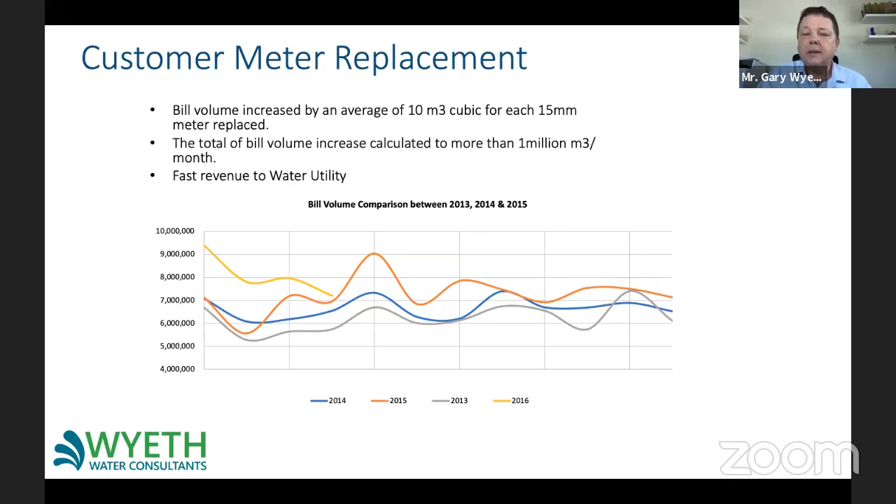Now that increase in revenue is something we're looking at because it's often what we call the virtuous cycle. As our revenues increase, we can actually spend more of that money. That revenue can be used to invest in further NRW programs, maybe pressure management, protection, or even more meter replacements. That will help reduce the NRW even further, which will give us more revenue or decreased operational costs, which will then improve the water utilities' revenues and profits - which is what happens.

Utilities work in this circle and they gradually improve, which is why a lot of non-revenue water programs take a long term - they can be 10, 15, 20 years. Utilities like Selangor's been doing non-revenue water for over 20 years. Johor is 15 years, that's been ongoing, and they're still working at it now. So this is something that's not going to happen quickly.

Now the issue we have with holistic programs is that often they can only be limited in length, maybe 3, 4, 5 years. So because we're looking at that longer period, it is the utility that needs to take over once the shorter holistic program has finished.

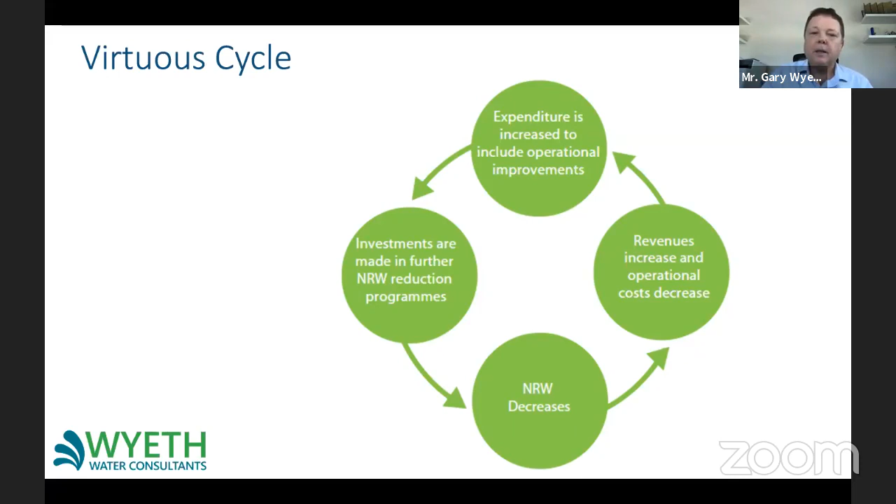So this means the government has to, either at a state level or federal level, subsidize these utilities to cover their costs. Now this can be done for political reasons, because you want to keep the people happy, or you don't want to increase the water rates too high. But if that's the case, there needs to be a fixed subsidy so that the water utilities know exactly what they're going to be getting on top of the revenues from their metering.

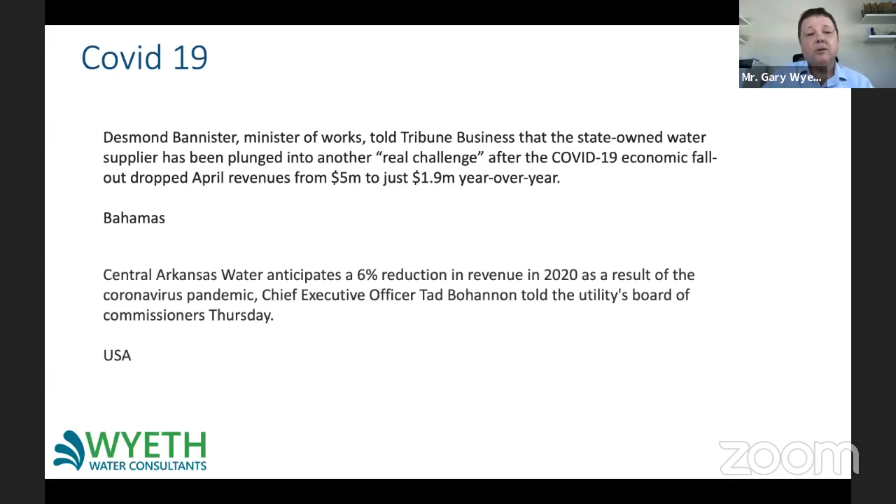So what's going to happen there? Are the governments going to have to subsidize that loss that's happened over that period of lockdown? And how do the governments actually work out roughly how much it is? Or do the utilities have to start looking at cost saving measures? Do they have to say, okay, we've lost money this year, 6%, 7%, 8%, so we're going to cut down some of our programs. And probably NRW would be one of the programs that they would look at and say, oh, maybe that's not so critical.

But fortunately, there are people out there who believe that this situation where you actually have lower revenues coming in is an ideal situation to boost the non-revenue water activities, because they're the ones that are going to help you to increase your revenues further and also decrease your operating costs, especially if you have a lot of repairs that need to be done or mains replacement. Hopefully, once we've got through this year and we get into next year, we'll be able to start getting back onto normal footings.

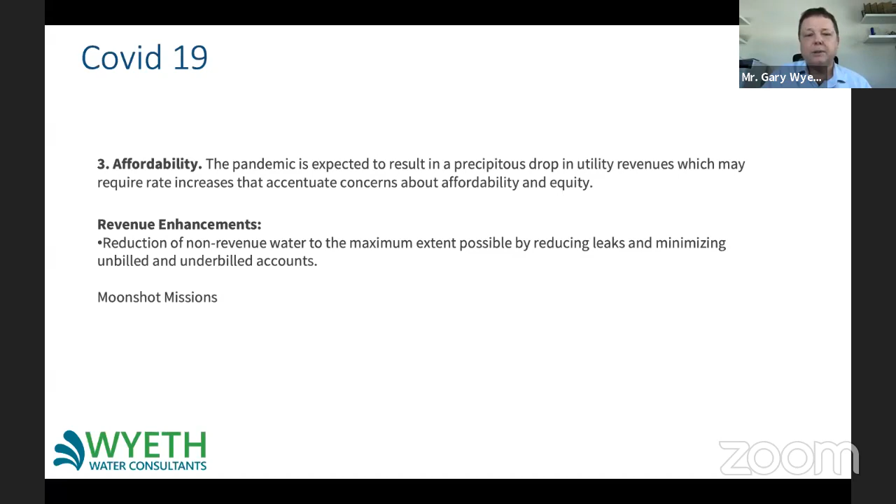Now, fortunately, in Malaysia, I think nearly every water utility uses handheld meter reading devices, which means that meter reading errors are almost 0, which is good. They then bring those handheld devices back to the office, and all of the data is sucked into the billing system, so accounting errors are almost 0. And even water theft is quite minimal here in Malaysia. So really, meter under registration is probably the major issue that we have in terms of commercial losses, which are affecting the revenue of your water utilities.

And the big factor that we have is actually meter accuracy over time. So as meters get older and older, they actually wear and tear, and we need to replace those meters. At what age do you need to replace them is a different discussion entirely, and I know that we have another webinar next week on metering. They may mention that, but there needs to be a target of when you need to start replacing meters, if it's 7, 8, 9, 10 years. It's something that each utility needs to work out themselves.

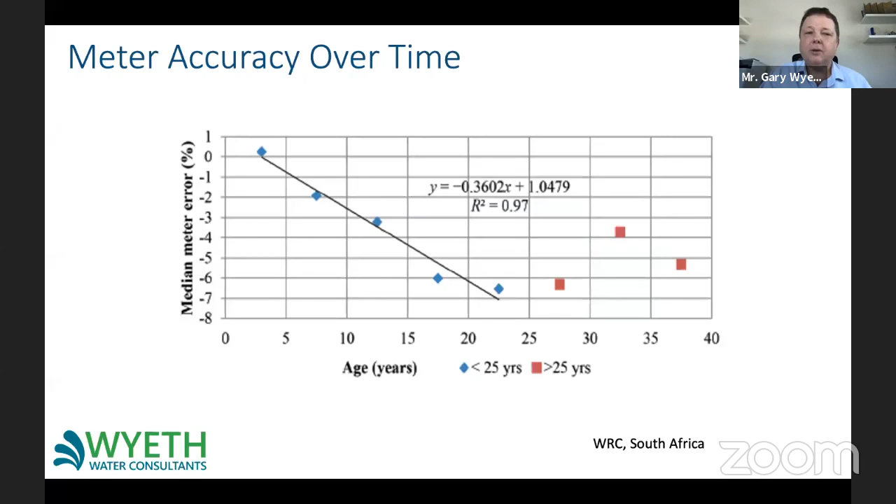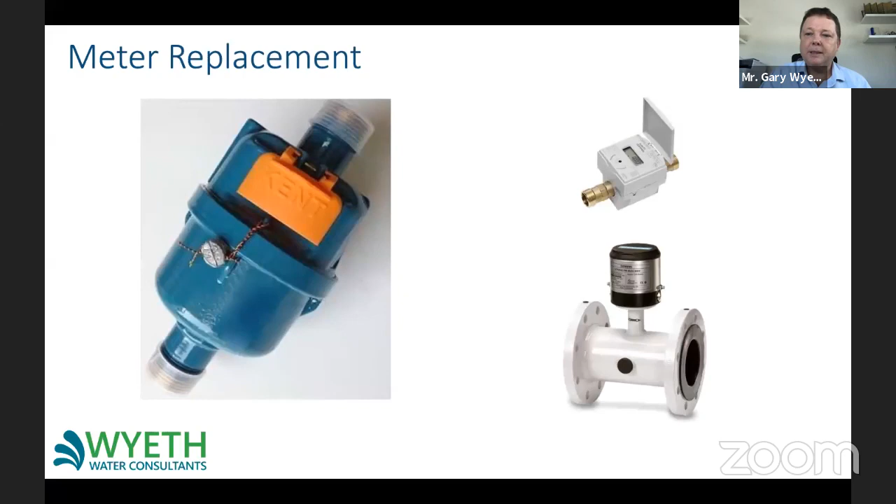But once you've set that target, you need to make sure that you are replacing meters once they reach that age, whether you think they're still accurate or not, because they could drop off very quickly and lose their accuracy. And of course, when you are replacing those meters, you need to make sure that you're replacing them with good quality meters that are going to last a long time and are not going to start failing very quickly within the first 3, 4, 5 years. So cheapest is not always best. Make sure that you're buying a good quality meter and that it's being installed accurately.

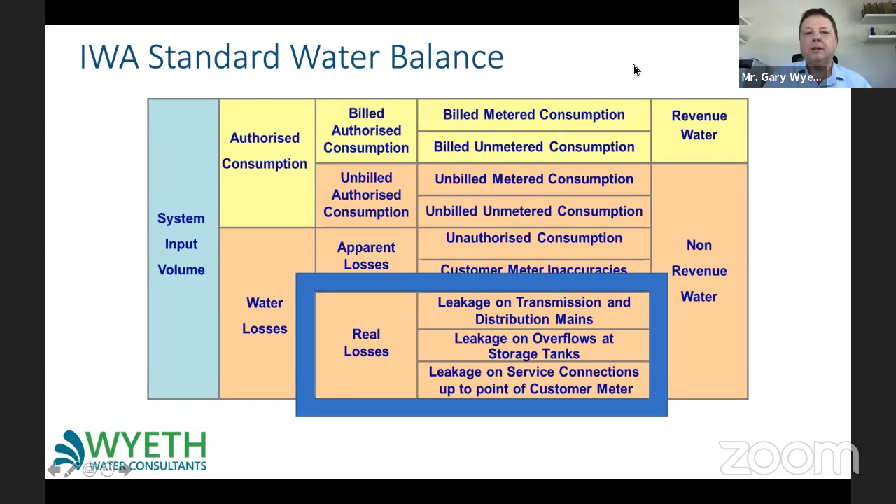Now, going back to the water balance, the other major component of non-revenue water that we have here in Malaysia is actually physical losses. And those physical losses are the thing that we need to concentrate on the most. We have active leakage control, speed and quality of repairs, pressure management, and pipeline and asset management. I'm going to talk mainly about those three, because these are the things utilities need to really concentrate on once the holistic programs have been completed.

The holistic NRW programs are basically going to get the monitoring situation in place. They're going to replace all of the customer meters. They're going to set up DMAs so that we've got flow going into different areas, and we're measuring each DMA and understanding where we have physical loss problems. The holistic programs are going to do pressure management in most cases, set up PRVs and put on advanced pressure management on some of them.

So in this presentation today, I'm not going to talk much about pressure management, but I'm going to concentrate on the other three. These are the main three that water utilities need to do as a continuity after the holistic programs have finished.

So let's start with active leakage control. Leakage is a problem for all utilities. It doesn't matter how low or how high your non-revenue water levels are. Leakage will always be there, and you'll always be having new leaks or bursts happening on a weekly, if not daily, basis.

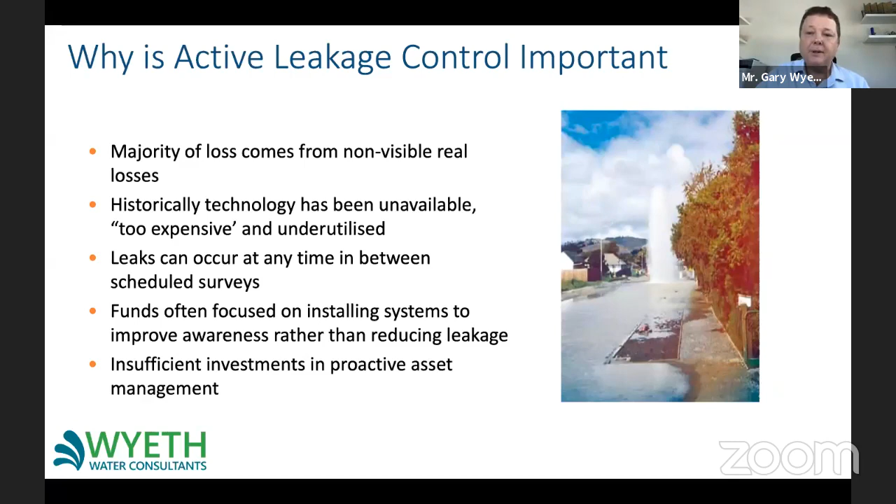Now, leaks can happen and be left unknown for weeks or months, depending on how much work is done by the utility to actively look for those leaks. And if we don't have sufficient leak detection teams and activities going on, what we will see is that the levels of leakage will start creeping up, especially after the holistic third-party contractors have left.

Now, if we look at leakage itself, we tend to break it down into three different types of leakage. We have reported leaks. Now, these are what we also call visible leaks. These are leaks where the water comes to the surface and you can actually see the leak or where it's coming from. We call it reported because generally somebody, either the public or someone in the utility staff, will actually report that leak or phone in on the hotline and say there's a leak, come and have a look at it.

Then we have unreported leaks. These unreported leaks are the buried leaks. These are the ones that are invisible, and the water maybe just seeps down into the ground or runs away in a river or a drain. The only way that we can find them is to do active leakage control. And then we have background leaks. Background leaks are the very small leaks, like weeping joints or very small pinholes that are basically not cost effective to find and repair. The only way to really address background leakage is to do pressure management or mains replacement. So what we're really concentrating on are the reported leaks and the unreported leaks.

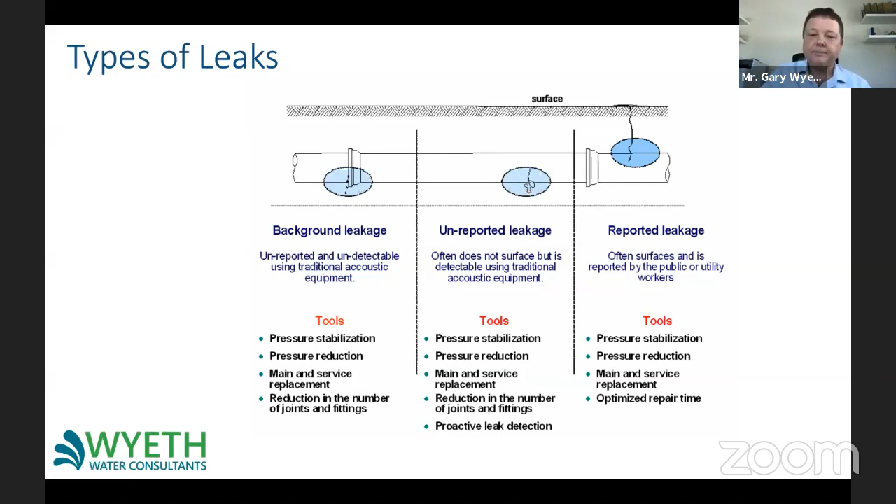Visual inspections are probably the most basic way that we can look for leaks, especially these visible leaks. These are fairly easy to spot because just by walking around or even driving around, you should be able to see these visible leaks. And as I mentioned, we also get calls coming in from the hotlines from people reporting these leaks. These are not what we would call too much active, this is just reactive. So as soon as you see the leak or somebody reports it, you go out and fix it.

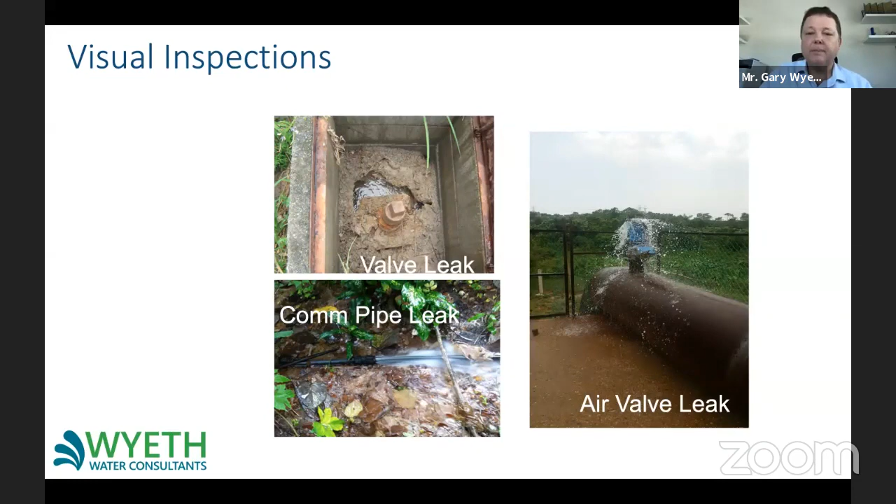Now, for those buried leaks, that's where we need to start using equipment. The basic way is to use basic sounding. So we have listening sticks, just mechanical sticks. We have electronic sticks that amplify the leak noise. And we have ground microphones. In this technique, it probably doesn't need too much skill, but it still needs a bit of training and skill, and people need to be walking large areas of a zone.

So you need to first identify where you think you have a leakage problem, and this comes down from your DMA monitoring. From your DMA monitoring, you might identify a DMA that has an issue. You can then do step testing to maybe break that down further into a small area. And then you need to go out and start sounding on any fitting you can find - a fire hydrant, an air valve, a washout, a customer meter, anything where you can put your devices on and start to listen for the noises.

Also with ground microphones, if the pipe is not too deep and the ground conditions are quite good, you'll be able to just listen to the surface, the ground surface as well.

Now, these devices are not necessarily going to pinpoint where the leak is, but they're going to generalize where a leak is, and then you can move into other devices that you could then pinpoint. You could also move into more sophisticated sounding.

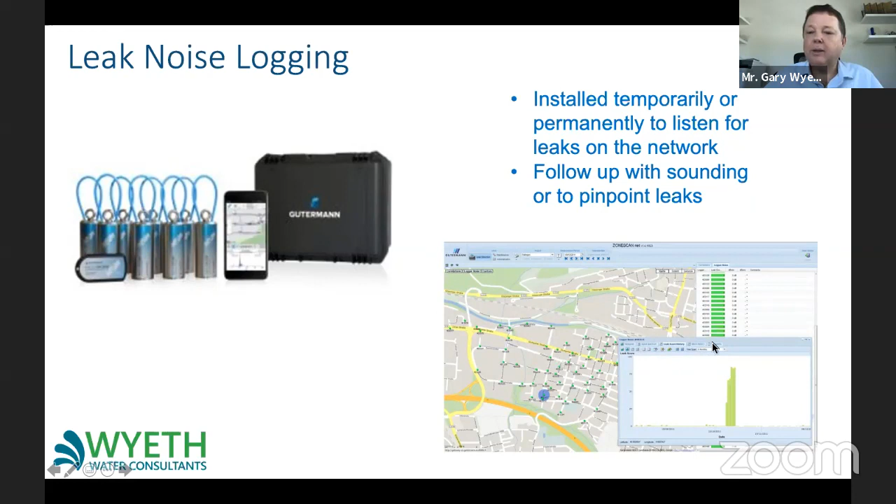And then leak noise correlators. These are devices where we can actually pinpoint leaks. If you don't have the leak noise loggers and you suspect there's an area that does have a leak, you can put these correlators on those pipelines to pinpoint the leaks and to verify that there is a leak and where it is.

So when we're looking at all of these technologies, from basic sounding to noise logging to correlating, they all need a fair amount of equipment, and you also need a fair amount of skilled staff who know how to use this equipment. And probably more than the skills, you need staff who are dedicated to what they're doing. They need to be people who you can send out and tell them there are leaks in this area, and they would go out and really look for those leaks. Not just do a half-hearted job and come back and say, oh, we couldn't find anything, even though you know there are leaks out there.

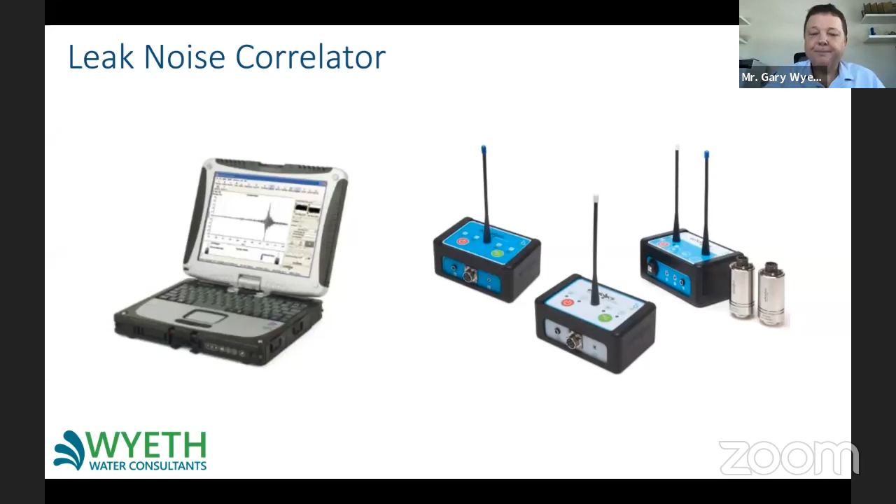Now, large diameter mains is quite interesting, because most holistic contracts that have happened in Malaysia have concentrated on distribution networks, looking at DMAs, doing pressure management in DMAs, doing leak detection and repair in DMAs. Very few, if any, have looked at trunk mains. I think the only utility that's really looked at it is Air Selangor. They've done a real massive program of their trunk mains, and they've been very successful. They've found a lot of leaks on their trunk mains.

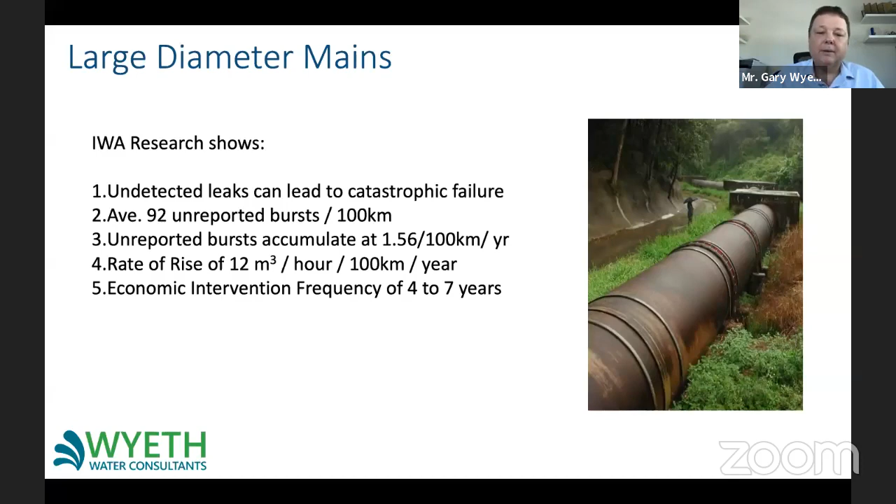And this doesn't mean that their trunk mains are more leaky than anybody else's. I can guarantee that all of the trunk mains across Malaysia and all the utilities will have a lot of leaks. And what makes it worse is that these trunk mains tend to have higher pressures, and they also tend to be made of a stronger, metallic material. So when they do fail, when there is a leak or a burst, at that high pressure and that sudden failure, you can have a lot of damage done not just to the pipelines, but also to the surrounding area. And what makes it really critical is that there's often a lack of redundancy.

I remember when I first started for a utility in Malaysia in 2003, my first day of work, I walked in and there was nobody there. And I said, where is everybody? And they said, oh, we've had a major trunk main burst. That burst took out a large area of the district that it was in. And it probably took about 4 or 5 days for it to be repaired and for it all to be back online and for the pressures to be back up.

So trunk mains are an area that utilities should be looking at. If you are developing holistic programs for the future, make sure that trunk main leak detection is put into those programs. I can guarantee you that it will be successful.

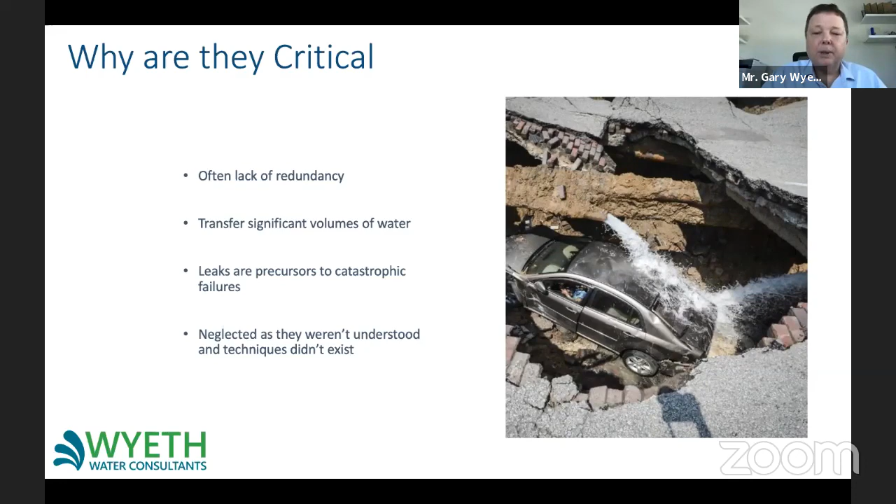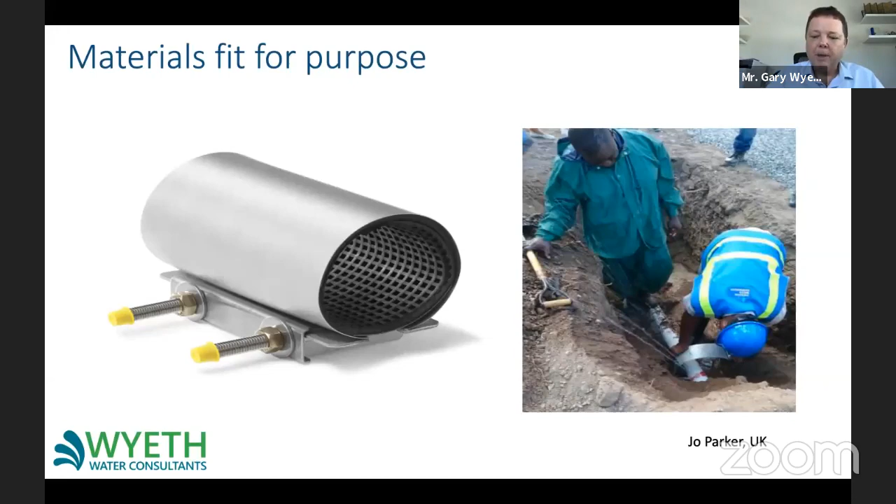Now, repairs. It's essential that when we do repairs, we use proper materials. And I think in Malaysia, most utilities do try to use the proper materials. Maybe people don't tend to use repair clamps, but maybe they use these couplings. These couplings would be where you cut out a piece of pipe where you have the leak, the burst or the crack, and then you put couplings in.

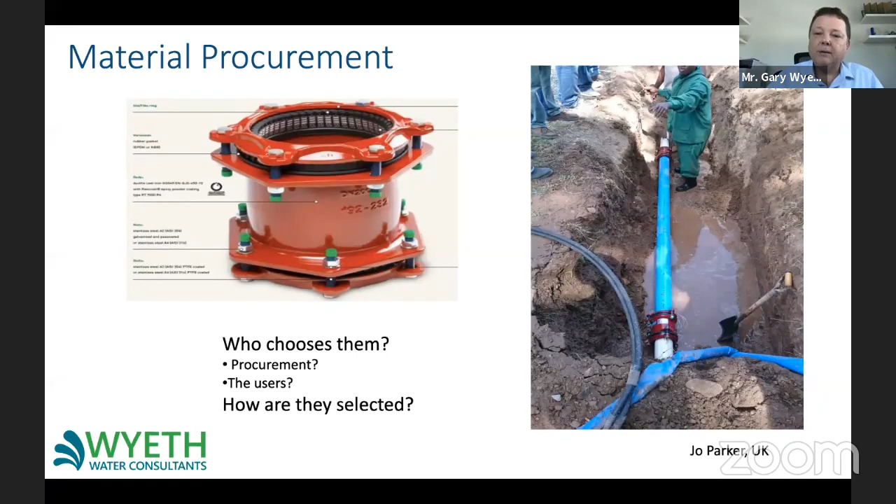But what's key is that you procure the right materials, making sure they're good quality, making sure that they're going to fit the right pipe size and the right pipe material, so that you're not going to have problems with those couplings failing either from the material not being good enough or from them not being the right size. So procurement of the materials when you're doing these repairs is critical as well.

And here's an example of a poor repair where you can see that somebody has actually cut out the road and they've dug down, and I would assume that they've actually made a repair and then they've reinstated it or covered it back over, but it's still leaking. Or maybe it's not still leaking, but it started leaking again. So making sure that when you do a repair, you do it right the first time and you do it properly the first time is key as well. It's a key part of your work to make sure that you're not going to have a backlog of repairs that just keeps on growing.

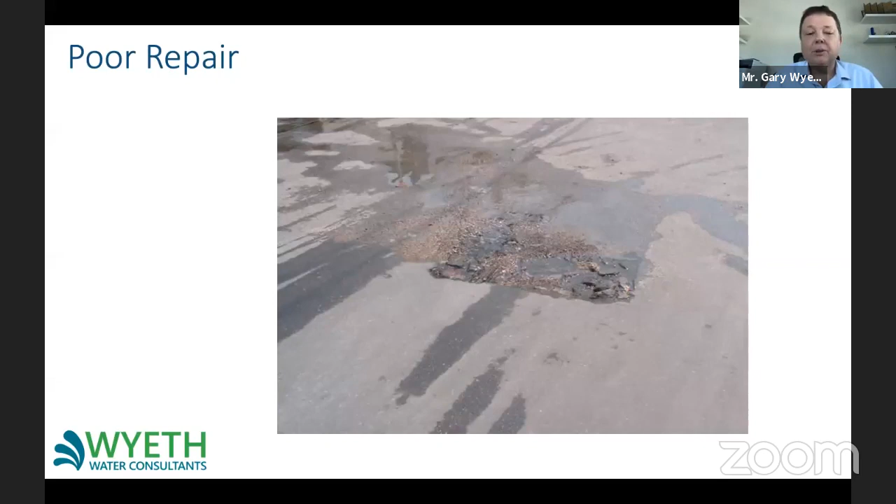And talking of backlogs, you can see here that this utility, it's not in Malaysia, you'll be happy to know, but this utility has actually mapped out all of the leaks that have been detected, and it's put all of those leaks onto a GIS map. And all of the green dots that you can see are actually leaks that have been repaired. The red dots are outstanding leaks. These are leaks that are waiting to be repaired. So you can see there that they have a huge backlog of leaks waiting to be repaired.

And if you are a non-revenue water or a leakage detection person and you find a leak and then you go back there months or even years later and it still hasn't been repaired, it's very disheartening and it makes you think, why do I bother finding these leaks? So getting leaks repaired as quickly as possible not only reduces your leakage volume, but it also helps with the motivation of your staff who are actually doing the leak detection.

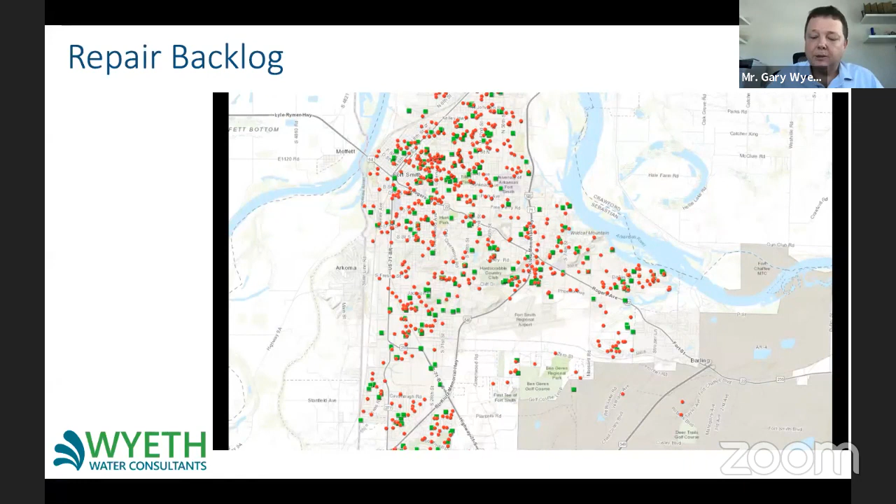Now, mains replacement is probably one of the key factors of any utility's non-revenue water management. And that's because as pipes get older and older, they actually get weaker and weaker. And eventually they get to the point where they're just so weak that they can't sustain the pressures that we're putting them under. And the problem is that utilities don't invest enough in mains replacement to actually keep on top of the pipes that they have in poor condition.

So quite often when I go to a utility, I always ask the question, what is the life expectancy of your mains? And people will often tell me what they believe their pipe should be, 30 years, 50 years, 80 years, or some of them 100 years plus. I know in many countries, they have pipes that are over 100 years, some 150 years old. So when people tell me that their pipes are only going to last 30 or 40 years, it seems to me a bit of a shame that you're spending a lot of money on an asset which is not going to last you as long, when if you did it properly, it would actually last much longer.

But if we look at replacement, assuming you have a life expectancy of your pipes of, say, 50 years, that means you need to replace all of those pipes within those 50 years. So if you have 10,000 kilometers of pipe, you need to replace 10,000 kilometers of pipe within 50 years. And so that you don't have a large backlog of pipes that need replacing at the end of that 50 years, you need to be replacing, on average, about 2% per year.

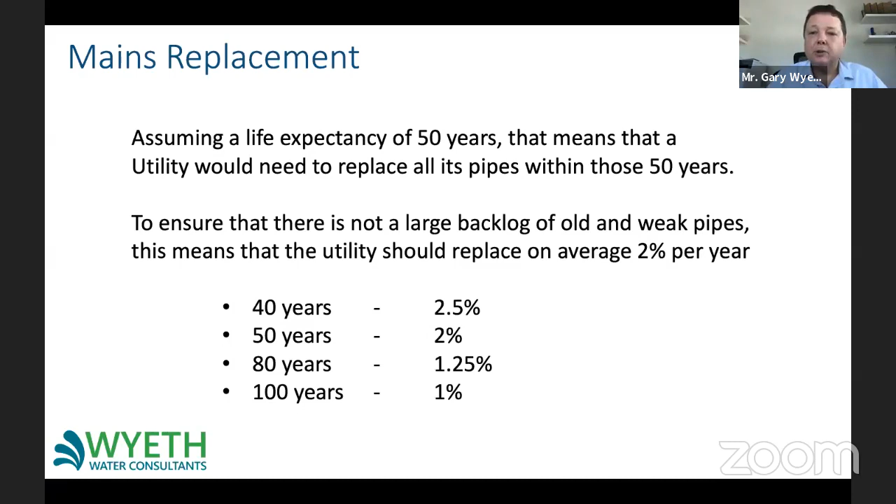So how do we increase the life expectancy of our pipes? There's really two options. One is to install good quality pipes using a good construction method from initial installation. And unfortunately, I don't believe that's done in Malaysia in many utilities. The installation of pipes, especially at distribution level, is done very cheaply, often by developers when they're developing housing areas, using not very good standards of construction. And this leads to many problems later on.

Or, and this is what most utilities do, they wait until the pipe is in a weak state, which sometimes can be after 20 years, and they start to undertake pressure management to drop the pressures really low to reduce the leakage volumes, and to start doing leak detection and repair activities in a sort of firefighting role.

I remember working in one utility where we would have some DMAs that would have 40 to 50 leaks every month. It didn't matter how many you repaired, the next month you would have 40 or 50 new ones. And it's at that sort of situation where you know your pipes are just gone and you have to replace them, whether they're 20, 30, 40 years old.

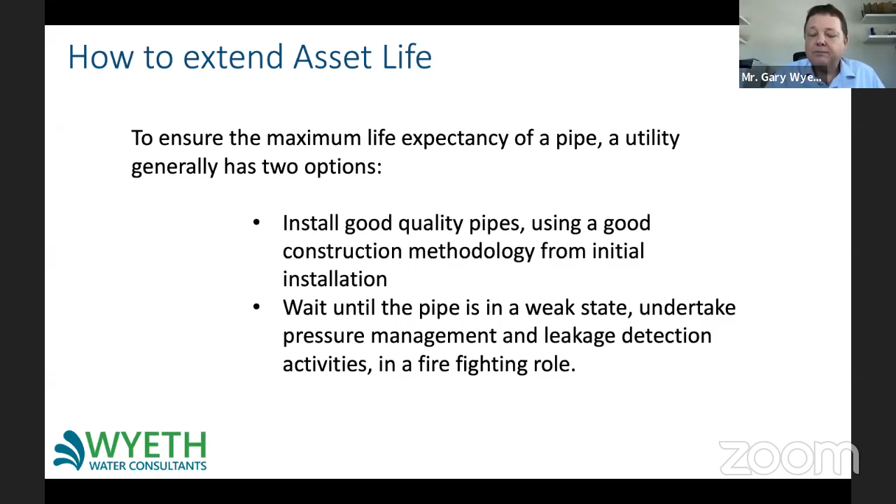The sort of things you need to be looking at, how do we make our pipes last longer? Storage. Before you even put the pipes in the ground, they need to be stored properly. On the left-hand side, we've got PVC pipe, which is just lying out in the sun. Now that means that PVC pipe is going to bake and it's going to become brittle. And when you put it in the ground, any sort of pressure on the pipe, either from soil movement or even rocks pushing on the pipe, is going to crack it and cause a leak to occur almost immediately.

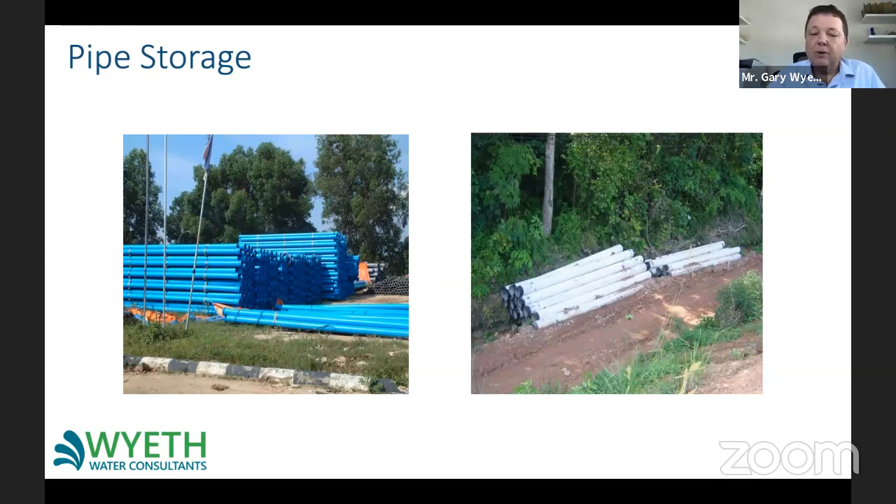And then on the right, you can see these mild steel pipes have just been piled up on top of each other in a ditch, and you don't know what the condition will be like. Well, we do, because I've got some pictures. And you can see here, we've got ends of pipes that have been bashed in. And we've also got pipes where they've been lifted off the lorry using chains without any protection, where the coating has been ripped off.

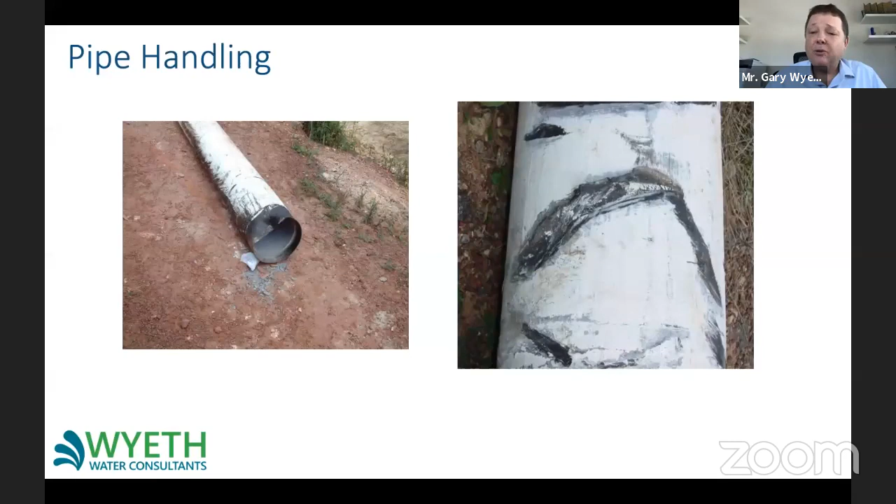Now, do you think that the contractors that were putting these pipes in threw these pipes away and said, oh, they're not good enough quality? No. They would have quickly put them in the ground. They would have knocked out this bit here, welded it all together, covered it up and said, that's fine. But what will happen is even within a matter of a few years, we're going to start to get leaks on the joints and also leaks at these points where we've got bare metal touching the soil. So ensuring that you store and handle the pipes is the first step.

The next step is actually protecting the pipe for its whole life. And the best way of doing that is to have a surround around the pipe of nice soft material. We call it a granular fill, but quite often this would be a sandy material. So we would put out a bottom layer of sand and compact it to get rid of any air that's in it. Then we would put the pipe in. We would then backfill with more sand and compact it again.

Then we can put all of that material that was dug out of the trench initially on top. And then we put on a final layer if we're going to be putting a road surface on top. If not, you could use the dug material all the way up to the top. What I often see in Malaysia is people put the pipe onto the bottom of the trench, and then the dug material is just dumped straight on top, which means you've got hard material pushing against the pipes. And also you're going to get large air pockets, so as soon as rain starts to get in there, you're going to get ground movements, the pipes are going to move and the joints are going to start to leak.

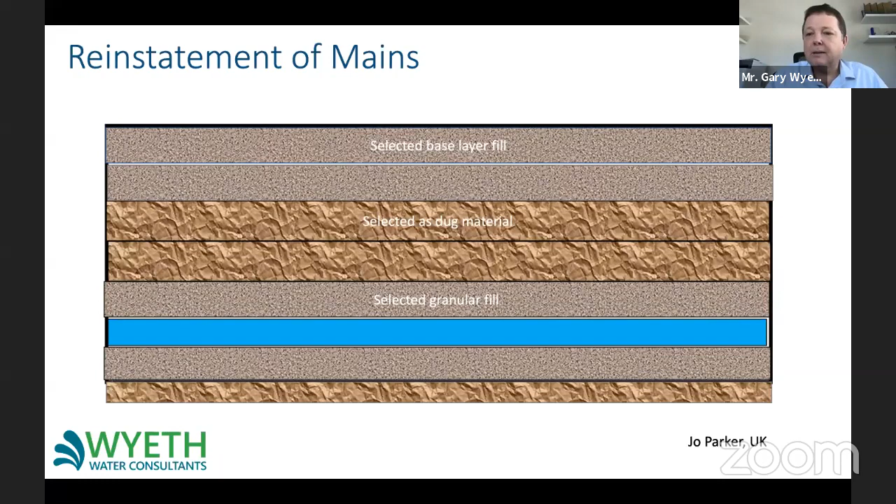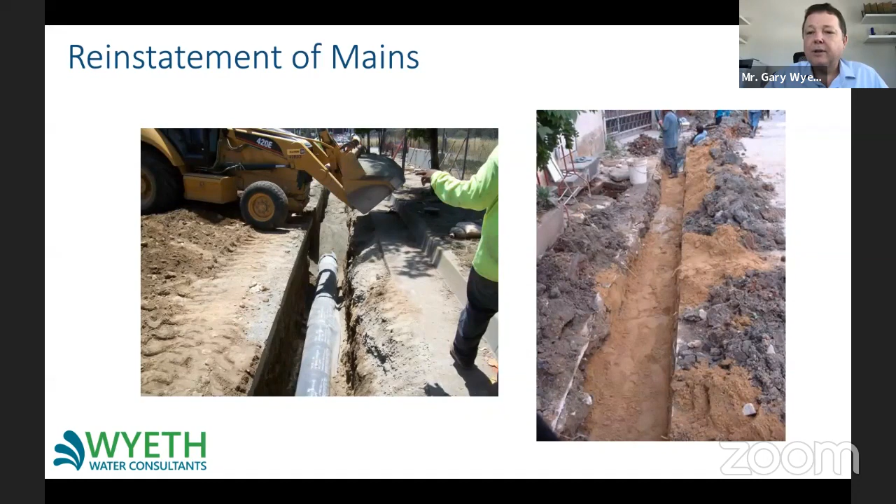So there's lots of issues that can happen if we don't have a sand surround of your pipes that is compacted properly. So this is something that I believe all pipe or mains replacement projects should be doing in Malaysia if they're not doing it already, to ensure that your pipes are actually going to last 30, 40, 50 years longer than they currently are.

Here we can see a couple of poor installations. The one on the left is where the pipe was put into the ground, but it wasn't compacted properly. What has happened is there's obviously been water got in there, either from rain or from a leak, and it's actually washed all of that material on top away.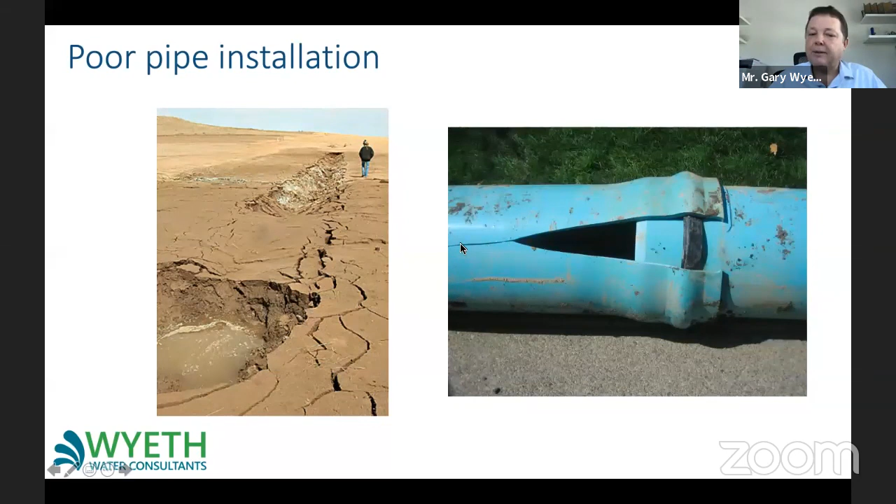Penang, as I mentioned at the beginning, are doing it. Air Selangor have now taken over from the third-party contractor before and are doing it in-house. And the same with Malacca—they had a third-party contractor and they're now doing it in-house.

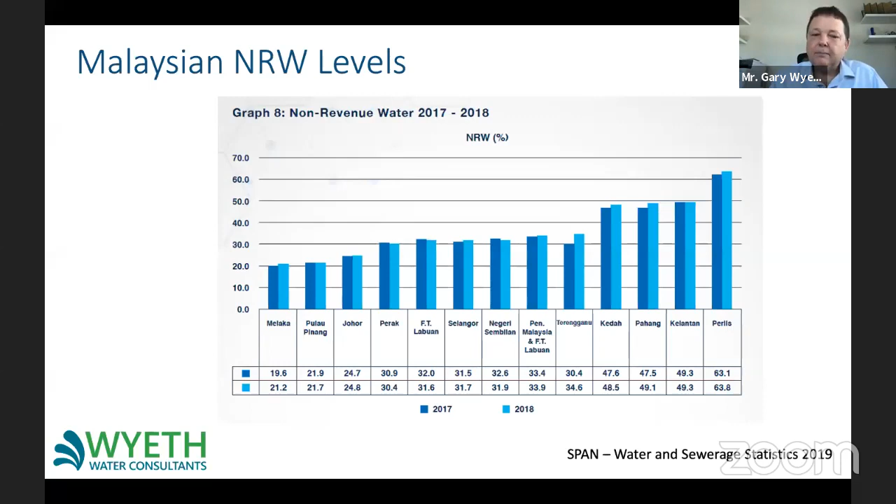The challenge we have for NRW needs to be looked at from all departments. Setting up an NRW team with maybe 10 or 20 people, or less, is not going to help you reduce NRW, especially if all the other departments, like billing, operations, and production, can say NRW is the NRW department's responsibility. You need a proper strategy, especially if you're doing it in-house, to make sure everybody understands.

It's everybody's responsibility. That's quite often why the first step of any in-house NRW program is to have an awareness program, and that awareness program needs to be for every single staff member. Every staff member needs to know: what is NRW? Why is it important? And how can I help to reduce it?

But it all comes down to being a management problem. And when I say management problem, I'm not necessarily saying the utility's management, but even higher than that, the board and the government. Everybody needs to look at this and make it a major priority, including the financial side of things, so there's enough money to ensure continuity, and motivation for everybody, from the staff doing the work up to top management, who give direction to the utility.